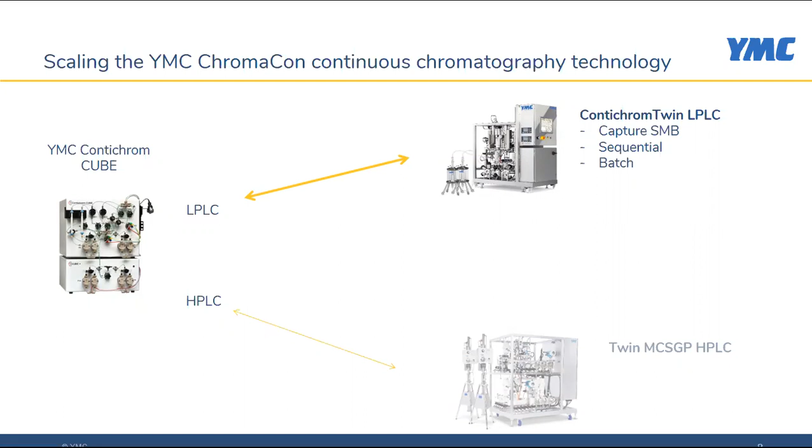It has been proven that it can increase the productivity by more than 2.5 times compared to the batch process, and reduce the buffer consumption by 50%. That means for the user that you can reduce your needs of resin for the initial capture step, which is mostly important for monoclonal antibody purification, where you reduce the needs for protein A resins.

Today's presentation will focus on the other functionality of the Chromacon patented technology, the MCSGP process, and we will introduce to you the GMP scale skids we have developed now at YMC Process Technology. These skids are HPLC skids, and they can also operate traditional batch operation as needed.

Again, there are a number of webinars posted where you can get more details about the Contichrom CUBE and the capture SMB. And so let me now start with the MCSGP process. In traditional HPLC purification, we have a problem concerning productivity. In analytical HPLC, we are striving for baseline separation, but this is not very productive and needs a lot of solvents.

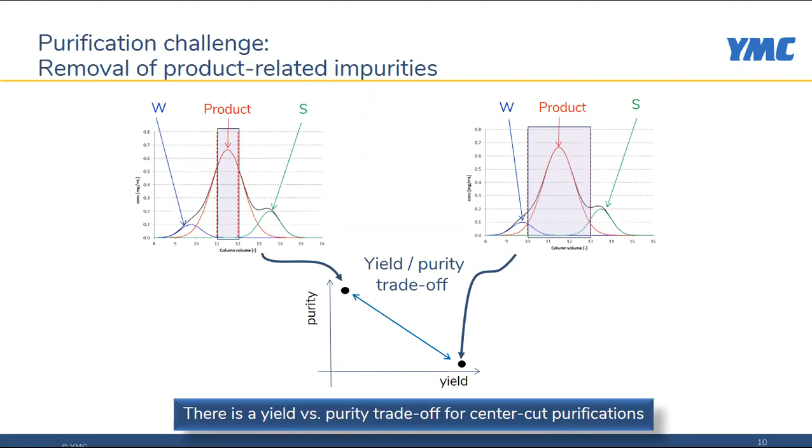So to reduce the solvent needs in preparative HPLC, injections are overloaded, but then there are product-related or process-related impurities eluting with our main peak. So we have to make a trade-off, either having a highly pure product as shown on the upper left side, or we have a more polluted product but higher yields. And this trade-off we try to overcome with the MCSGP technology.

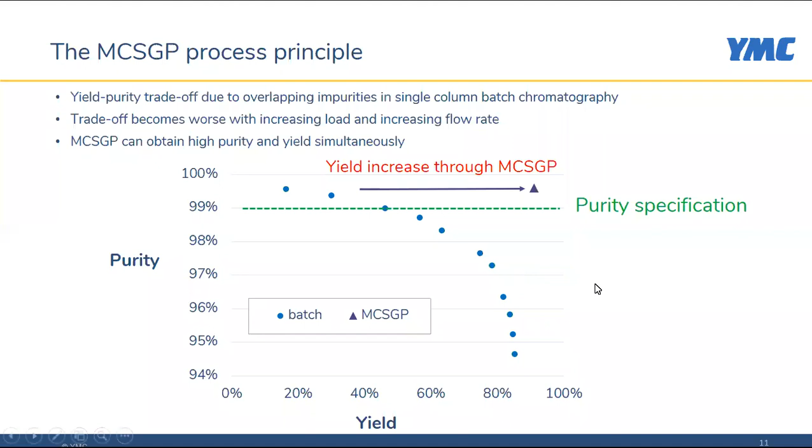And as you can see in this plot here, outlined very nicely, is the capability of a batch process: either high purity or high yield. And with the MCSGP, we can come to a point where we maintain the high purity and keep a high yield, and that means we have a high productivity in our process and need less solvents for the purification step.

Again, you see on the left side our traditional batch HPLC process, where we usually discard the front and the back side fractions which are more polluted with process or product related impurities, and we only collect the main peak with the high purity. Sometimes in batch chromatography, folks collect these fractions with higher impurity and then do an extra load at the end of the run.

But with the MCSGP process, we can now automate this internal recycling of the impure product fraction in the front and in the back of the main peak. We also can apply a linear gradient or gradient formation in the elution. And again, this is an automated process that does not need any interaction of an operator to proceed. It's all programmed, as you will see later in the presentation.

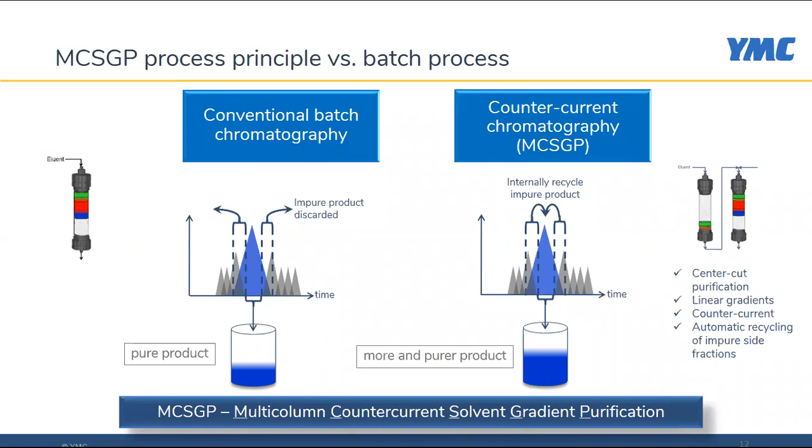And I come now to the point: MCSGP, the meaning of the acronym reflects the functionality, which means multi-column, we are running with 2 columns, solvent gradient purification process. Again, details you can find in related webinars.

But we just wanted to show on this slide the applications which have been shown with multiple molecules on the bench. As shown here, A, B, and C isoforms of monoclonal antibodies could be nicely purified with high yields, but also aggregates could be purified from a monoclonal antibody, and pegylated molecules were purified applying the MCSGP process. It is also applied to oligonucleotide purification, as we have shown in other case studies, or peptide separation.

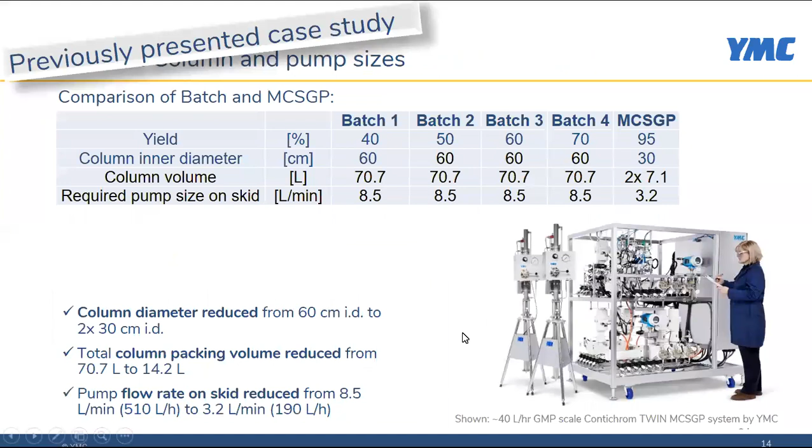In a case study, we could show the advancement of the MCSGP process for oligonucleotide purification, and here clearly the productivity was improved by more than twice the initial batch operation. The yield of the process increased from 60 to over 90%, and buffer could be reduced by 70%, which is very important when we are running with organic buffers.

And also, if you think about this improvement, what does it mean for my overall process? So I have a higher productivity. So either I can scale down my upstream process to a smaller synthesis or fermentation process, or I can reduce the downstream needs. So for instance, instead of using a 60 centimeter ID column, the process can be run with two 30 centimeter ID columns, which then also reduces the needs of packing materials.

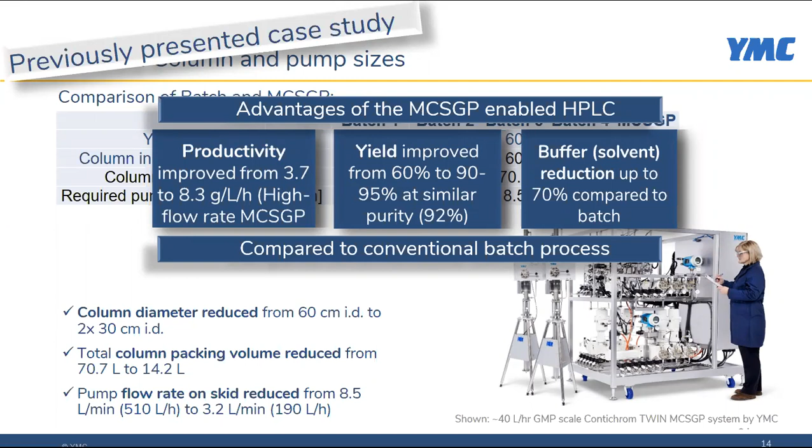In this case, it was a significant reduction down to 15 liters instead of 70 liters, which also means you can reduce the needs for the skid sizes and the pump requirements for your process. And this is a significant reduction. Half of the flow rate is needed, and if we can reduce the footprint of our skids, this is important for our customers. And that leads me to our second speaker, Matt Bowie, who will introduce to you our GMP scale skid in more detail and highlight the specific functionalities of this unique novel system.

So as Gerard had mentioned and Kathleen had elaborated, the MCSGP process is very efficient, but that also poses some technical challenges for our team at YMC Process Technology. But it is made possible by implementing some very great mechanical features. And in today's presentation, I will guide you through some of them.

So the first step, let's go through the P&ID of the systems. We have 4 pumps here. Pump A and C are dedicated for gradient. D are for solvent and dilution. All of them are capable of operating at up to 100 bar design and 80 bar operation.

We try to achieve symmetrical design with minimum hold-up volume so that the MCSGP can implement successfully, because we have 2 identical columns and the pipeline have to be identical between these 2 runs. We also have several sensors and valves. Those are all dynamically controlled by the patented Mcontrol.

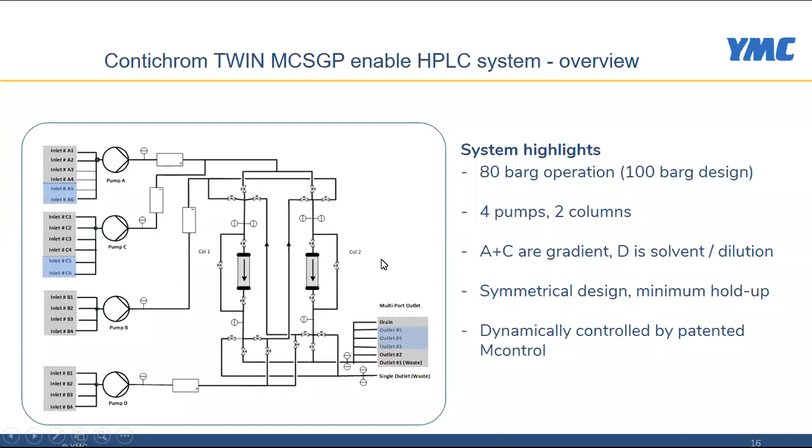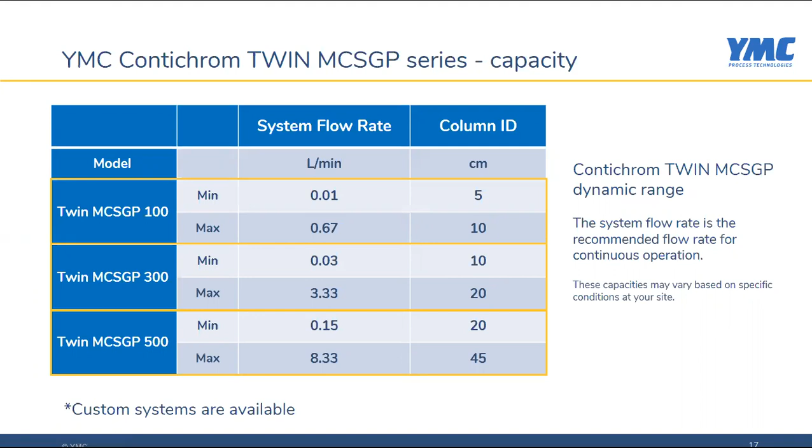As standard, we offer 3 different models with the flow rate up to 8.33 liters per minute and column ID up to 45 centimeters. In terms of technical compliance, the system comes as standard for Class 1 Div 2. So that allows you to run different hazardous buffers and flammable buffers with ease. We also can provide an option for CE conformity, including ATEX Zone 2.

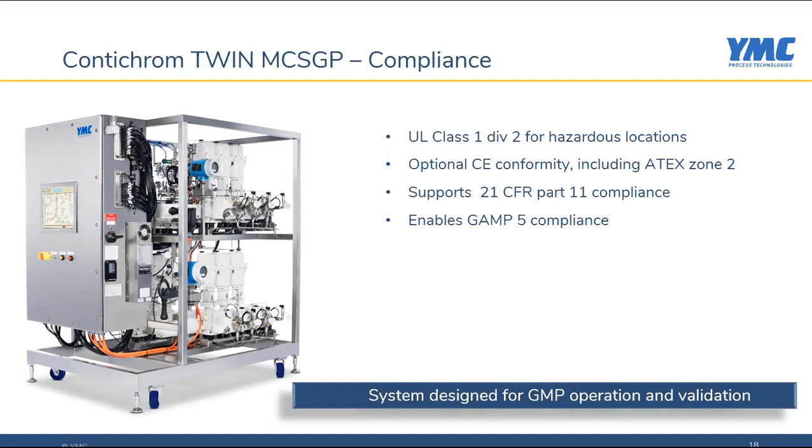Automation-wise, we can support 21 CFR Part 11 and also enable GAMP 5 compliance. So the system is designed for GMP operation and validation, and our team at YMC can help you to do that. When you walk around the system, you can notice several key components that make the MCSGP process possible.

You can see the HMI here, the purge unit for hazardous location. We have 2 pH and 2 conductivity on top of the system, 2 UV sensors here, and a cluster of 20 fast-acting valves in this area. We have 20 inlet valves across 4 pumps, and the pumps are special for this application because we have a combination between stroke adjust and servo motors on pump A, C, and D.

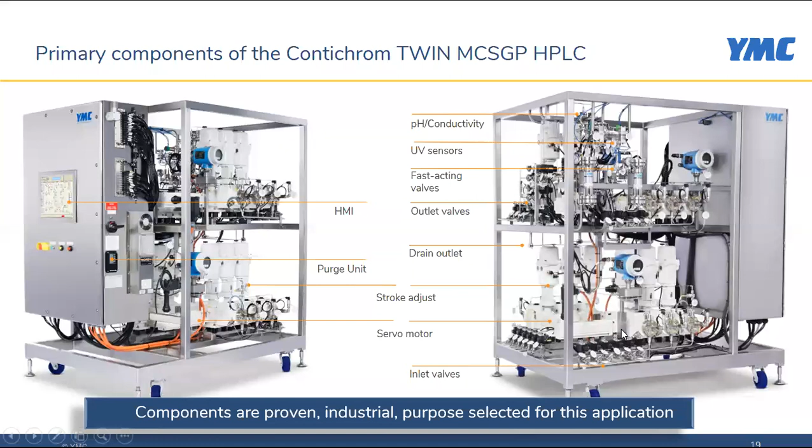I want to highlight the first key component, which is the pumps. We have 4 pumps in the system, and 3 of them have servo motors and stroke adjust. So this combination provides capability for the pump to run at very wide range. The ratio between the highest flow and the lowest flow can be up to 190.

So with that specification, you can run very shallow or steep gradient and at the same time achieve very good linearity. And these have been tested for 80 bar operating pressure with no problem.

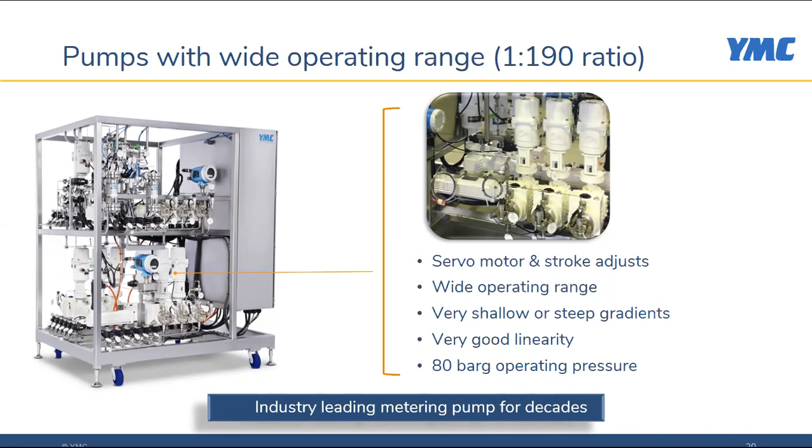The second component I want to highlight is the fast-acting valve. You can see these are very compact compared to the rest of the skid, and we stack 20 of them in this area. And in that way, the distance between the columns and the valves is minimal. So that keeps the hold-up volume very low.

The construction of the valve is very simple, yet it's very robust and operating very fast. This one has been tested and proven for over 500,000 cycles. And that's enough for almost 10 years of continuous operation 24/7 with the valve switching every 10 minutes.

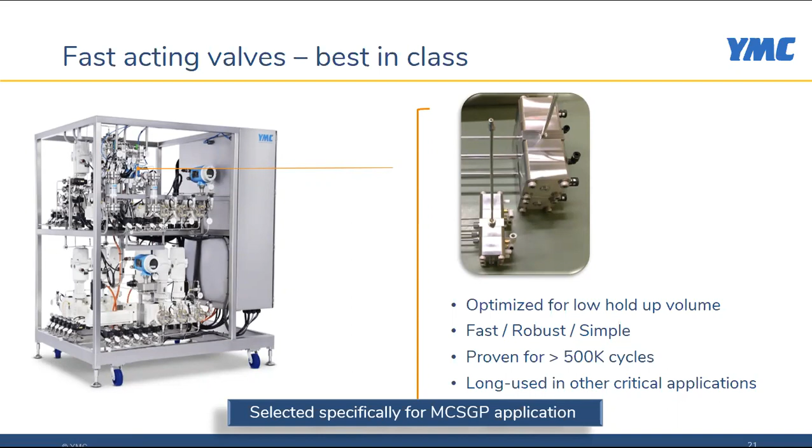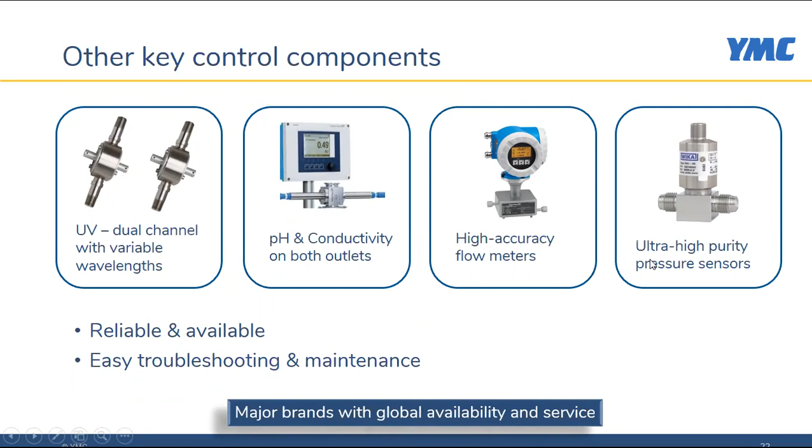And these are not new. These have been used for a long time, for over 15 years in other critical applications. And we select them specifically for MCSGP application. All other components in the system are from major brands with global availability and service, WIKA and Endress+Hauser, etc.

The MCSGP process is very sophisticated, and we try to make it very simple and user-friendly with our automation platform here. This is the FactoryTalk platform, and you can see we have all information that you can imagine in the main screen. On the top right, we have the basic recipe information.

In the middle, we have a current sequence. And the flow path in the P&ID is highlighted so that you know what is happening in the system. As you can see here, we have a connected elution sequence where column 1 takes the flow from pump A so that it can elute through outlet 1. Column 2 takes the flow from pump D, and that goes through to the second outlet here.

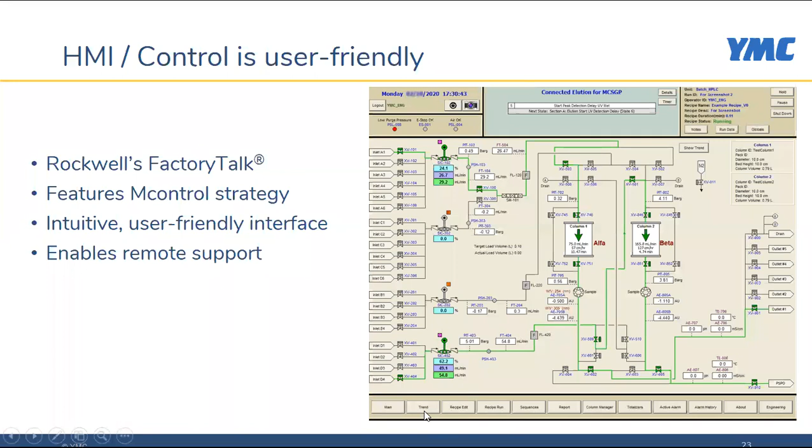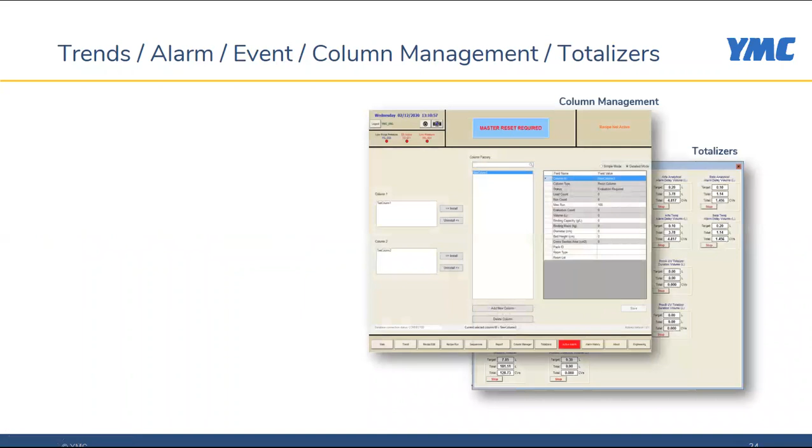You can see it's very intuitive, and you can access different buttons at the bottom here that allow you to have very quick access to different functions in the system such as totalizer, column management, engineering screen where you have high-level tools and configuration for engineering levels, such as pump tuning, parameters, remote access enable, etc.

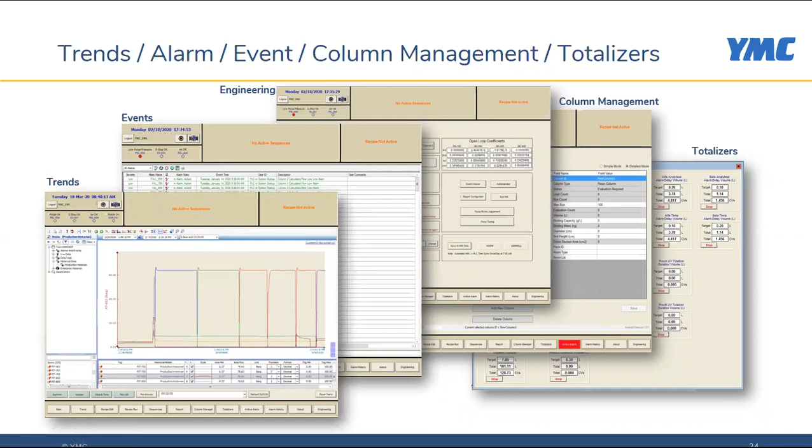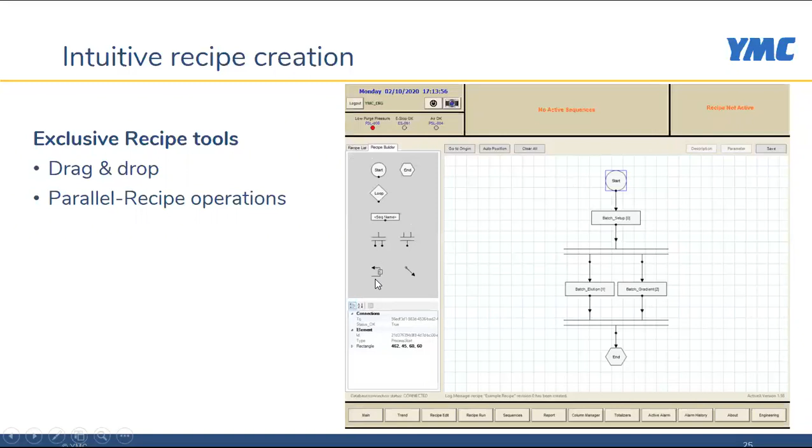Noticeably, you can see there are two sequences running at the same time. We call it a parallel recipe. Column 1 can run elution, column 2 can run gradient. And you can also loop it with different conditions here.

Because the MCSGP process can run for days or hours, you don't want to wait until the end to know what's happening or what has happened with your process. So our tools can generate the report instantly, either for a single cycle or multiple cycles, at any time. You can also configure the report to include performance, transition and peak analysis in this tool.

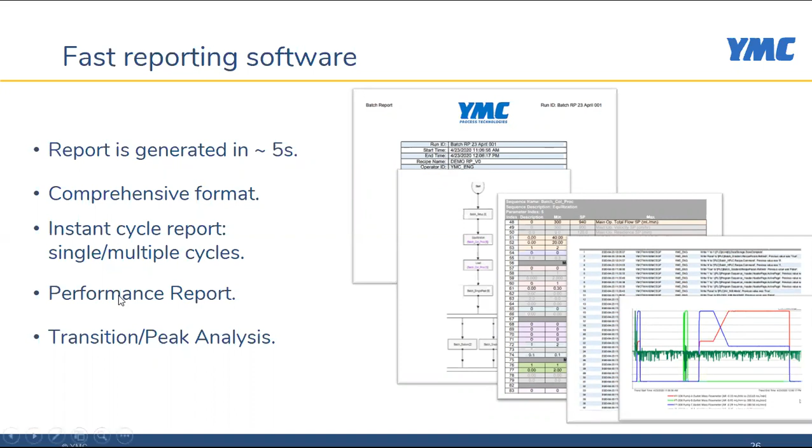So we have overcome a lot of technical challenges and made the MCSGP process available and possible. Many of you are familiar with the cube for large scale, and with the new system for MCSGP at GMP scale, we believe you can take your chromatography process and production to a new level.